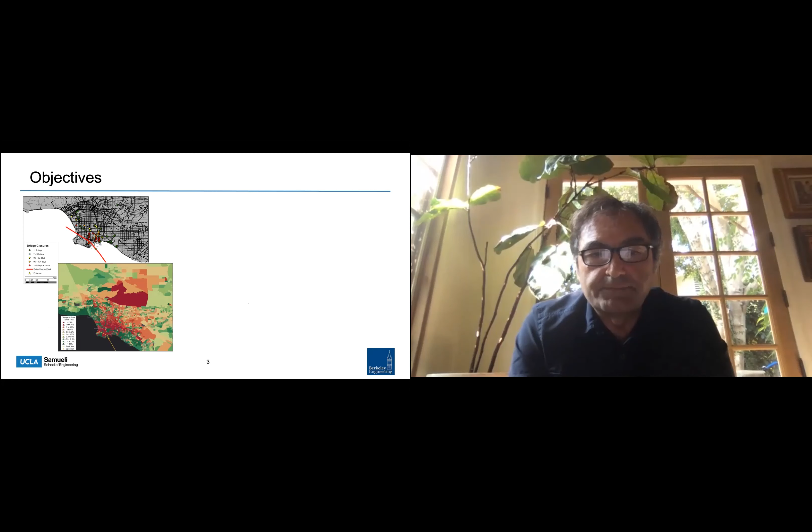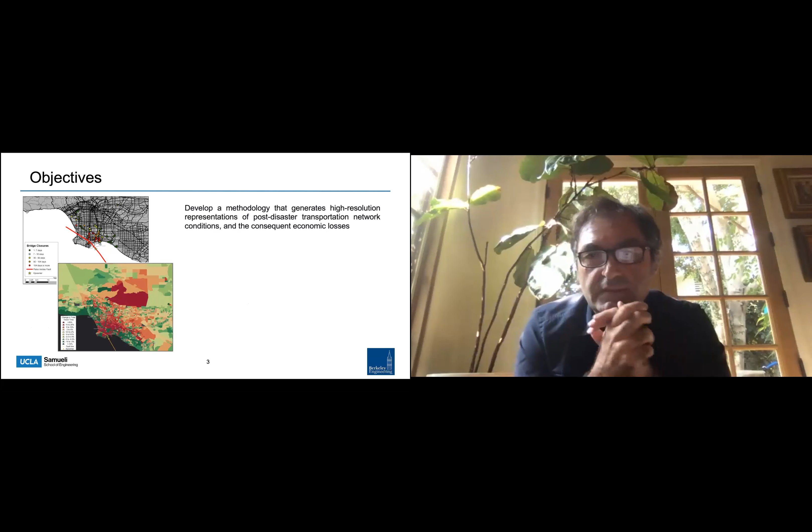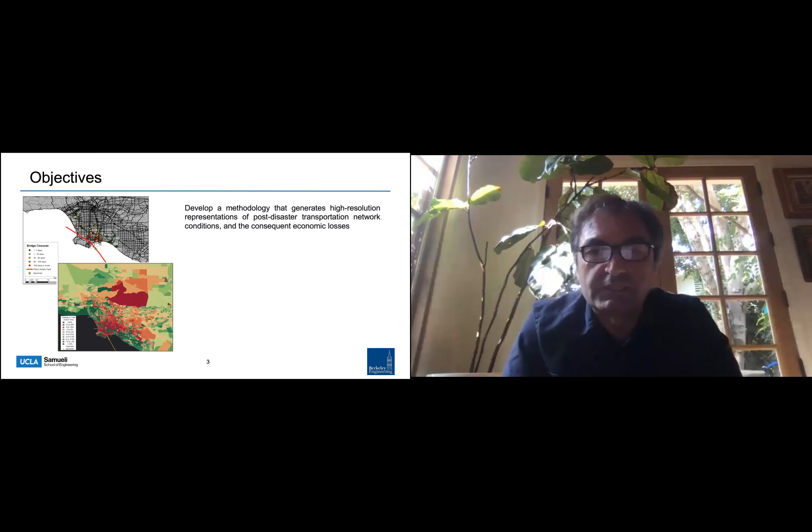So we want to look at a hypothetical earthquake event, a scenario-based event, and see how it will impact a particular region. And our methodology is quite similar to what you've seen from Rodrigo's presentation, but it differs in certain ways from it. We would like to develop the fragilities that are structure or bridge specific. We'd like to come up with detailed models, OpenSees models, from street view images and satellite images and other data for every bridge involved. And then, instead of looking at the annual losses that this network will experience over its lifetime, we want to just develop first fragilities and then look at a scenario-based event to see what will happen to those bridges.

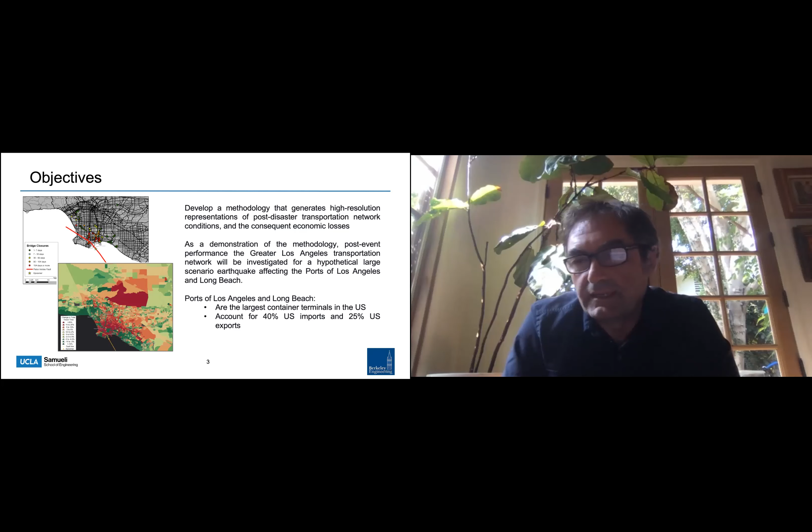And this is a mere demonstration of this overall methodology, but our application region is Southern California, and we're focusing on the ports of Los Angeles and Long Beach, which are the largest container terminals in the US, and they account for 40% of the US imports and 25% of the US exports. So an earthquake in the area that will disrupt the transportation network will cut off these ports from the rest of the state and the nation, and then can create some cascading losses.

We have a framework that comprises two segments, and they're naturally divided between the two universities. At UCLA, we're taking care of the hazard characterization and model development for bridges and calculating their fragilities. And we hand over this data to our colleagues at UC Berkeley, and they do a traffic and economic loss analysis. Their analysis combines traffic simulations, but uses data from the Southern California Association of Governments databases and traffic demand models, and comes up with detailed estimates of delays and losses in traffic.

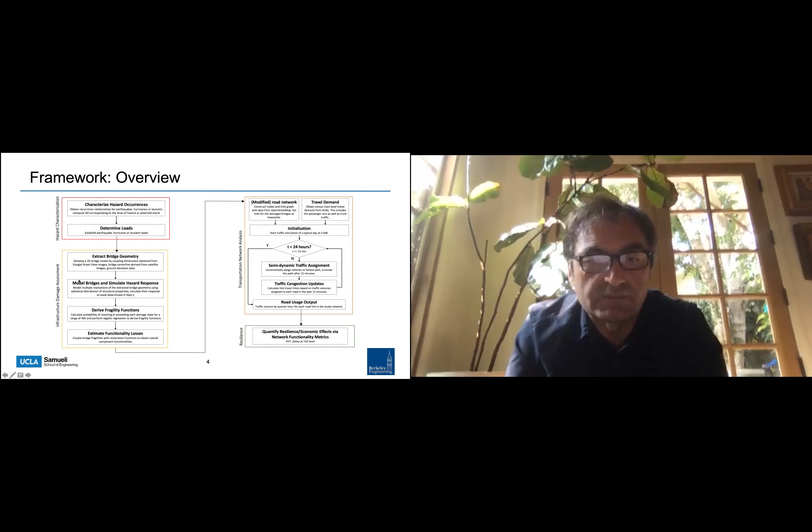And so this is, in a way, a convergence research where two domains are interlinked: seismic hazard and loss analysis, and consequent traffic and economic loss analysis. And our objective is to really go to the very end of the workflow and maybe come up with a resilience curve that shows the impact of a scenario-based event to the region and how the region may recover over time from that event.

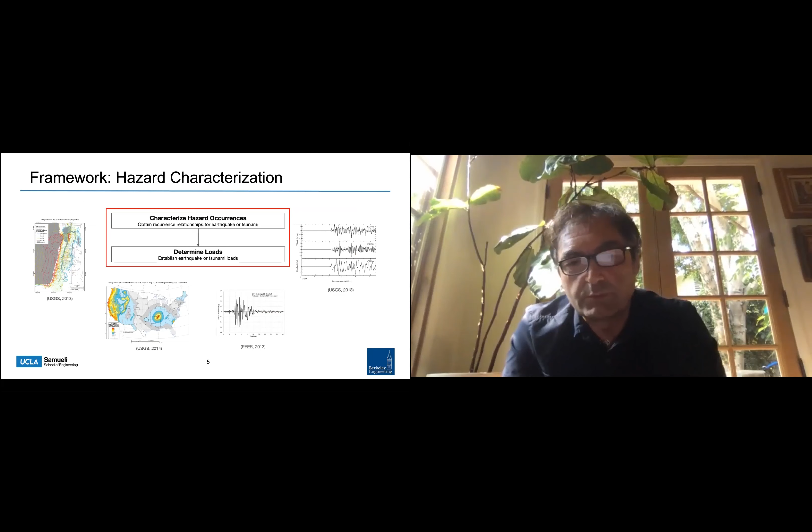I guess if not everyone, most of the people attending this workshop are familiar with various components of these workflows, one of which is the hazard characterization. So I'm going to skip that, but we know how to do hazard characterization thanks to the prior efforts by PEER, Southern California Earthquake Center, USGS, et cetera. We have tools with which we can do probabilistic seismic hazard analysis, come up with seismic deaggregation for every bridge site, and come up with a suite of ground motions that represent the hazard in that region.

And when we get these results, these ground motions, we do incremental or multi-stripe dynamic analyses to obtain the fragility curves. And at the very end, we evaluate probable damages to this network of bridges under intensity measures computed from a scenario-based earthquake. In this particular case, our scenario-based earthquake is the connected Palos Verdes fault that may produce a large earthquake, and the scenario that was previously simulated by others is a 7.3 magnitude earthquake that will happen right at the edge of these ports, very close by.

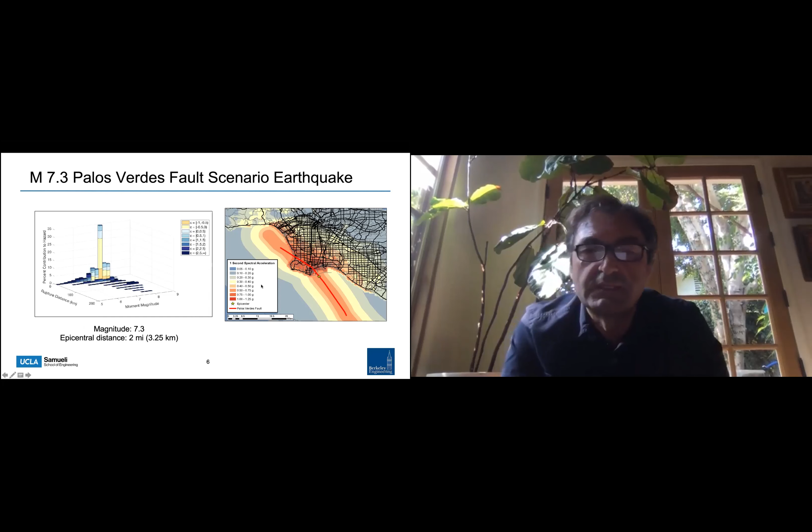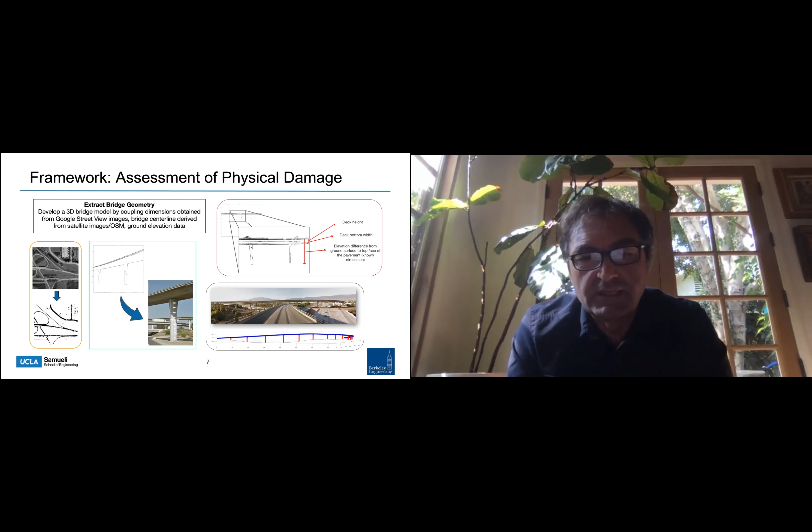These models can become very detailed and fairly accurate. And of course, our scheme can only generate the geometry of these bridges considered. And of course, there are other variables such as reinforcement ratios, foundation types, abutment types, etc.

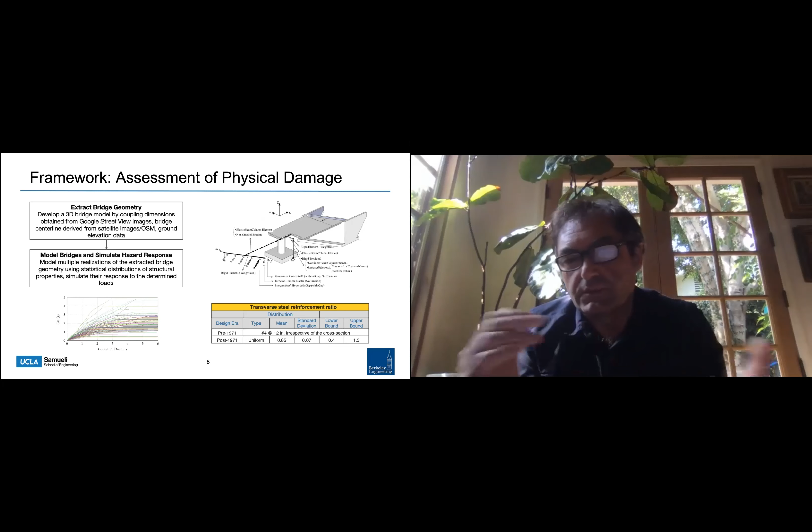And for that, we rely on previous work carried out by Caltrans under the leadership of Cliff Roblee in collaboration with the Georgia Tech team, who have created probability distribution functions and databases for different vintage bridges, metadata, which include things like transverse reinforcement ratio, the seat lengths, all kinds of data. And we use all those data to come up with OpenSees models.

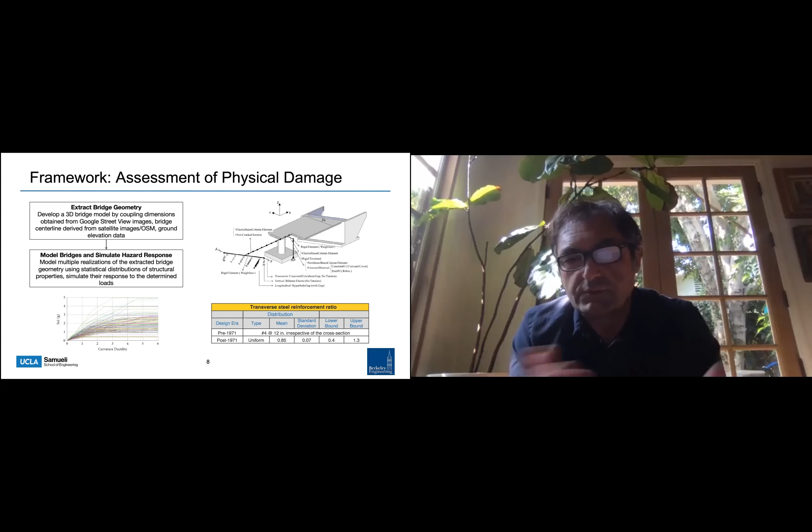And once we have the OpenSees models and the suites of ground motions for each bridge, we do incremental dynamic analyses and obtain IM-EDP curves and eventually fragility curves that you can see here. For example, spectral acceleration of first mode period versus curvature ductility. We can do these analyses for all the bridges in question.

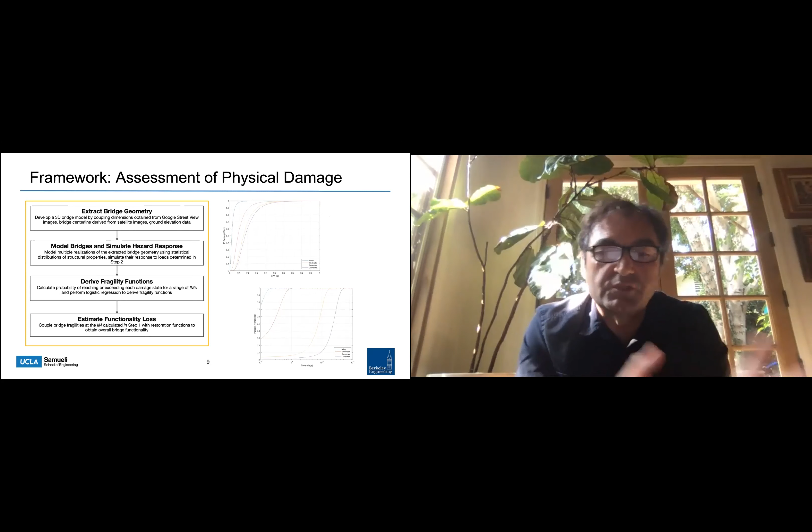And then we use the ATC formulas to convert the damage data into closure data. This is a very empirical conversion, and we are just end users of these empirical formulas. And so they should be taken with a grain of salt. And this is an area where I think a good amount of research effort should be focused on to figure out how damage translates into closures, but we are using it as is from the ATC.

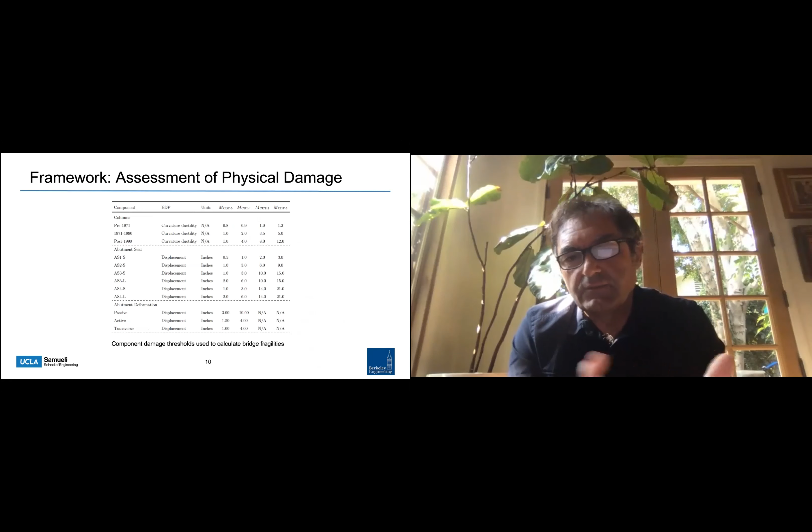This is a table of the damage measures and classifications we're using for different EDPs. We're looking at abutment seat displacements, curvature ductilities, etc. And then we are able to bucket our losses into 4 categories of low, medium, high, severe damage, etc.

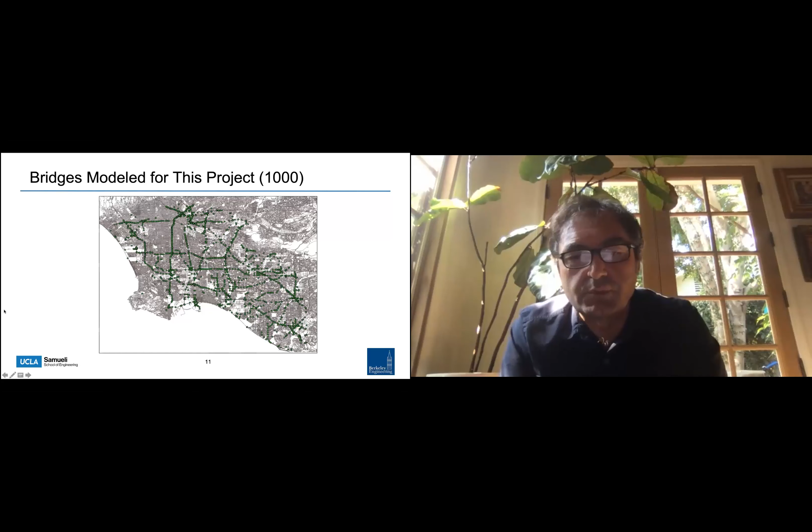We have modeled 1,000 bridges in the region for this analysis. This may be a bit of an overkill, but we just wanted to demonstrate that we could do this type of analysis and modeling. And of course, a huge number of these bridges have not been damaged at all from this even large event, but some did, especially the older stock, pre-1971, and those that are close to the ports and close to the fault line, fault rupture.

So that's where we handed off our calculations to our collaborators, our team at UC Berkeley. And this is not my expertise area, so I'm going to just basically recite what they have done in a very coarse way. I hope some of our team members are in the audience, so if I get some questions, they can help me answer those.

But our team had to first build a road network, and they have obtained it from open source OpenStreetMap for the 6 counties that comprise the SCAG, the Southern California Association of Governments region, which include the Imperial, Los Angeles, Orange, Riverside, San Bernardino, and Ventura counties. And this resulted in a very complex, large network comprising 600,000 plus intersections and almost 1.5 million roads.

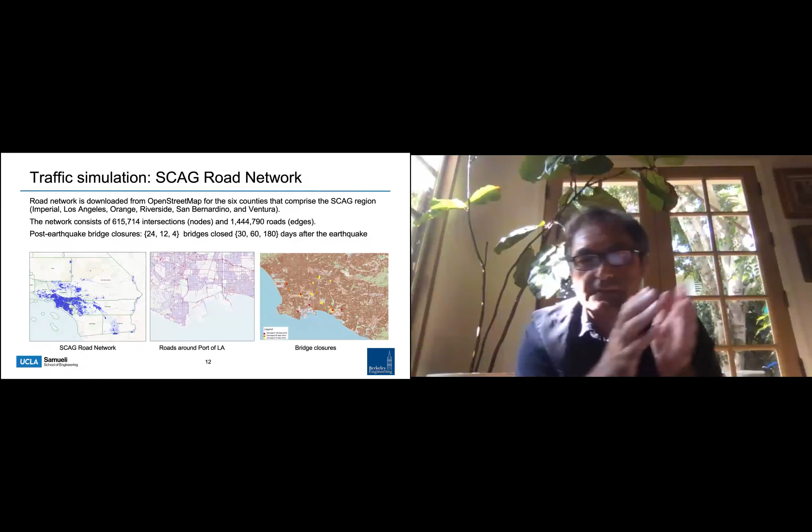So when you do traffic simulations, or rather loss of traffic simulations on this type of a network, it's very computationally intensive. And of course, our team has simulated how the traffic delays occurred in this region, with snapshots of time 30 days after the earthquake, 60 and 180 days after the earthquake. And we have provided which specific bridges have been damaged and closed to traffic to our team at Berkeley and how they have recovered over time.

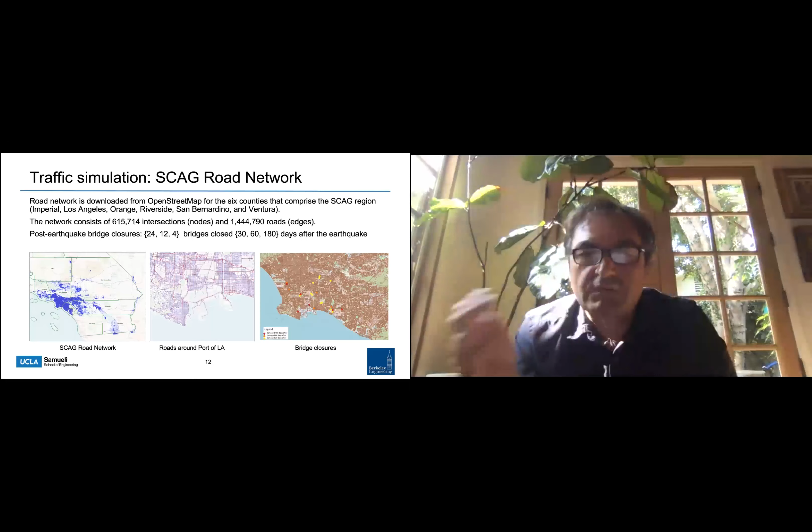With that information, they were able to carry out simulations of delays in traffic. And our research is still ongoing, so we are considering improvements in this. But right now, we are not attempting to distinguish direct traffic losses to and from the ports of Los Angeles, almost the entire portion of which is freight traffic, whose economic value is much different than the economic value of trips that other people take in the region.

And they're interacting with each other, and delays of one type of trip are going to cause delays in another type of trip. Right now, we're not really distinguishing that in any way, but we're able to compute the traffic delays in the region, and then we can come up with at least a crude approximation for now for what may happen in terms of economic losses.

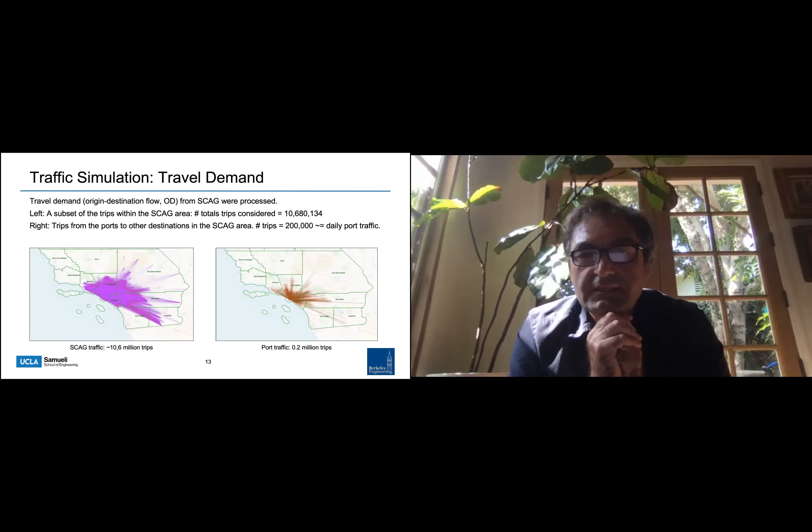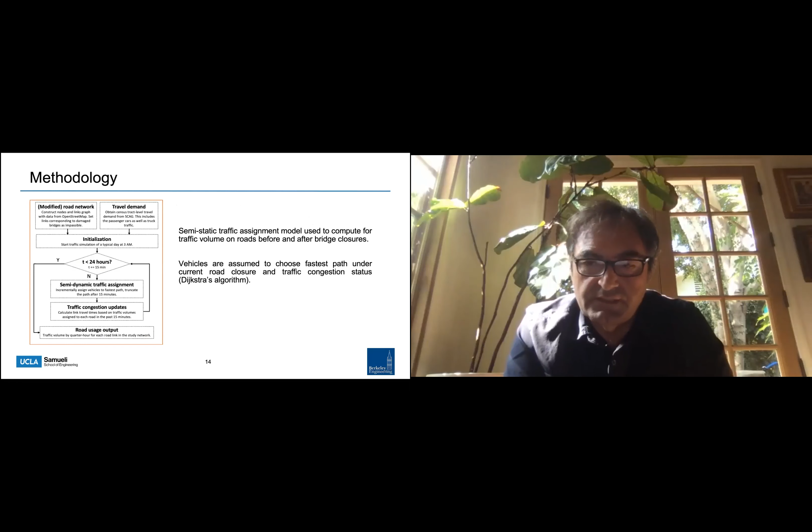So in the simulations, our Berkeley colleagues have considered 10 million trips, 200,000 of which were originating from the ports of Los Angeles and Long Beach. This is a flowchart of their workflow, and their method is a semi-static traffic assignment. And with that model, they compute the traffic volume on the roads before and after bridge closures. And they are assuming that the vehicles are choosing the fastest path under the current road closure and traffic congestion statuses using Dijkstra's algorithm.

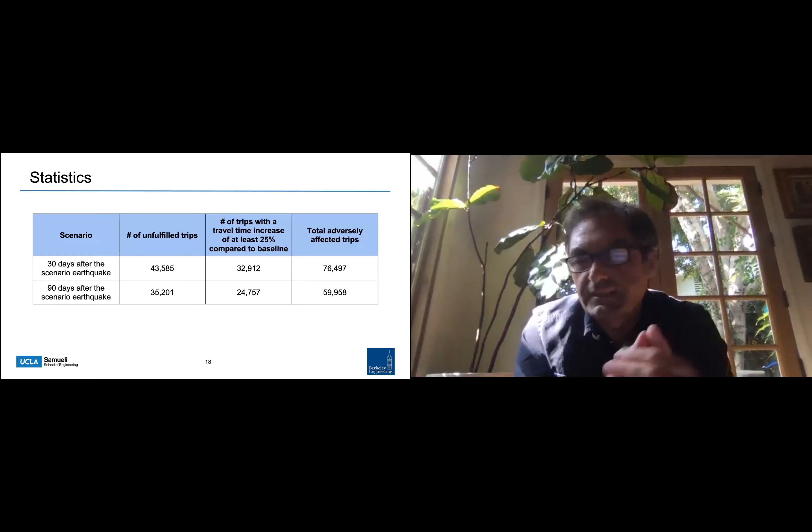And of course, then you have accrued some economic losses during that process, which come in the form of both direct and indirect losses. So those are calculated right now, again, in a relatively simple way, which we are considering to make more realistic and complex. But the overall cost is obviously going to be always a summation of direct and indirect losses.

The direct losses are basically the repair and replacement costs of these bridges that were damaged. So we have used some data from the Federal Highway Administration. That is a bit dated and not adjusted for inflation, but we have used some data from them to compute these direct losses. The indirect losses are also coming in two flavors. One set is the cost due to delays, and the other one is due to connectivity.

So when people are having to travel longer and more hours, then they're losing time on the traffic. And then we use that lost time and multiply it with a ratio of median household income in the US per 2,080 hours worked per year, a normalized number. And then for the losses due to connectivity, we use the annual gross regional product of California normalized by the annual labor hours in California, and we multiply that with the lost time in traffic delays.

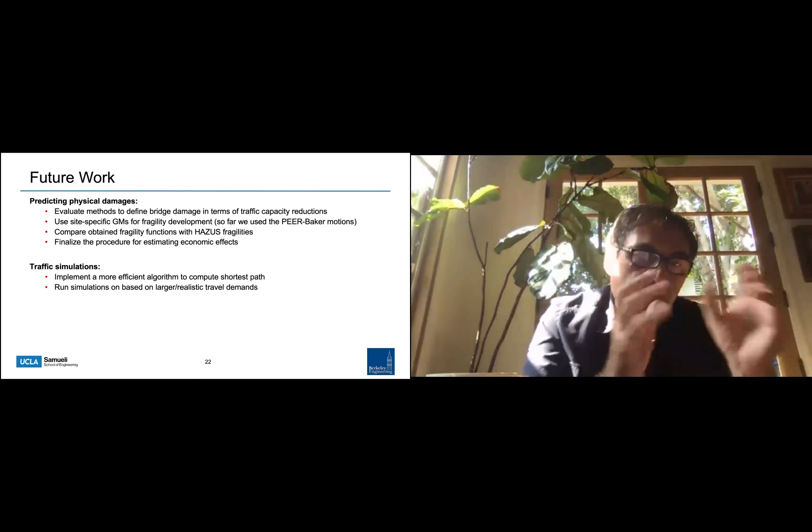What are we doing between now and the end of our project timeline? We would like to improve our work in both areas. One area, physical damages, the other one, the traffic simulations. In the physical damage area, we'd like to evaluate methods to define bridge damage in terms of traffic capacity reductions rather than binary open-close. We'd like to actually use site-specific GMs. We have taken a shortcut so far. We've used the PEER transportation ground motion suites.

And we're going to redo our calculations with actually site-specific ground motion. So again, the hazard, the damages and the numbers will change. One thing that we'd like to do after that is to compare our findings, especially fragilities versus the Hazus fragilities. Ours are structure, bridge, and site-specific fragilities, and Hazus has generic ones. So what are the differences in loss estimates between the two options? We'd like to quantify and present those. And then we'd like to finalize and improve the procedure for estimating economic effects.

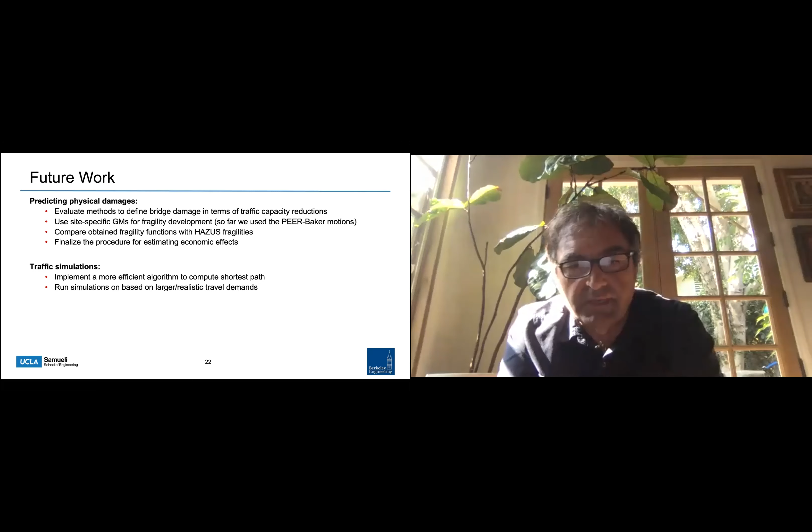On the traffic simulation side, we'd like to implement a more efficient algorithm to compute the shortest path. It's a computationally intensive algorithm, and our colleagues at Berkeley are using GPUs, et cetera, but still those simulations are really, really intense. And there may be ways to improve them. Perhaps we could even consider adapting neural networks to make some predictions. And of course, we'd like to also run simulations based on larger and more realistic travel demands. So with that, I conclude my presentation.